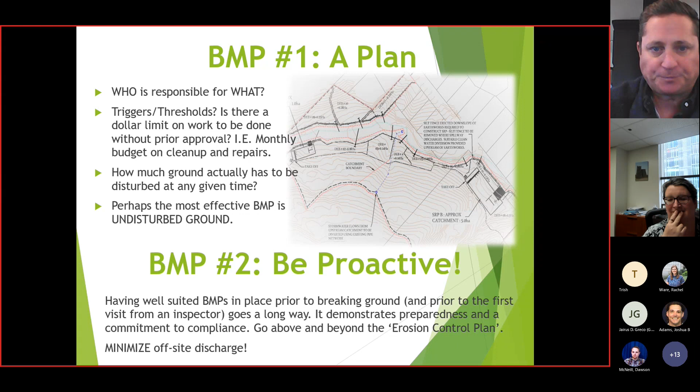I also like to define the differences between erosion and sediment control. We see this plan sheet that talks about erosion and sediment control. I like to draw a distinction between sediment and sedimentation. You'll notice there I've got the ATION in parentheses. I'll get into that more here in a second, but let's understand that there are two different processes.

There's erosion and then there's sedimentation. Erosion is very simply just the displacement of soil, right? It's soil put into movement. It's soil being removed from its complacent in situ state, its happy state of just sitting peacefully on the soil. And that can happen several different ways, primarily in construction. It's driven by wind, rain, and even the individual raindrops.

But if you think about that soil sitting in its happy state, even wind is not a very erosive force until that soil is disturbed by, let's say, vehicular traffic or rain or something else that disturbs it from its in situ state. So it takes an active force to dislodge soil and pollutants from its happy state. If we think about those different ways of causing erosion, it's driven primarily by two different factors: impact and movement.

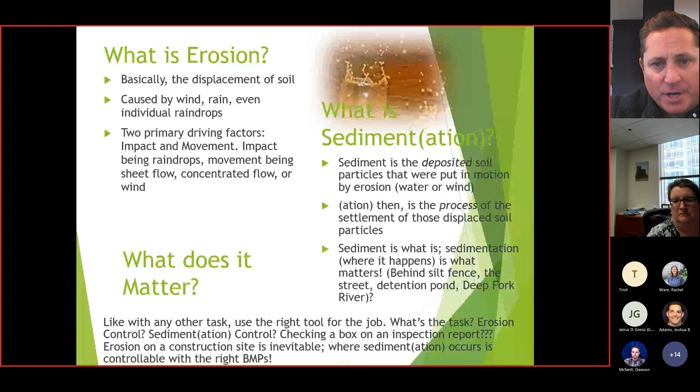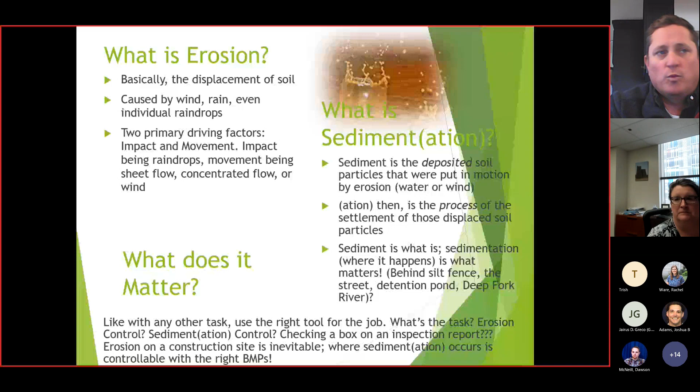Like I brought up earlier, erosion is basically driven by impact or movement. It's like peeling off the layers of an onion. We can peel back one more layer and ask ourselves whether that erosion is driven by impact or movement. If we look at impact specifically to start with, then we start thinking about what are the best BMPs that we can utilize to minimize erosion from an impact standpoint. Standing vegetation, like I talked about earlier, is number one.

So that can come from either not disturbing it to start with or by stabilizing it as quickly as possible afterwards. That could be achieved by sodding it. It can be achieved by seeding it with a mulch. I'll dive into that a little bit further here in a second.

We've got mulch here. Anything that dissipates the impact of raindrops, anything that dissipates the impact of vehicular traffic, those are the things that prevent the soil particles from being disturbed, which opens them up to being moved later on down the line, creating the erosion. So if we can keep soil particles, pollutants, and debris intact and in place, then we can prevent their movement down the line in a big rain event, windy days, etc.

If we look at the second part of erosion control and look at the movement side, we can peel off another layer of the onion and we can look at that from a sheet flow standpoint versus a concentrated flow standpoint, right? As rain increases, water increases, standing water increases, water that does not percolate into the soil begins to gain in volume and gain in concentration.

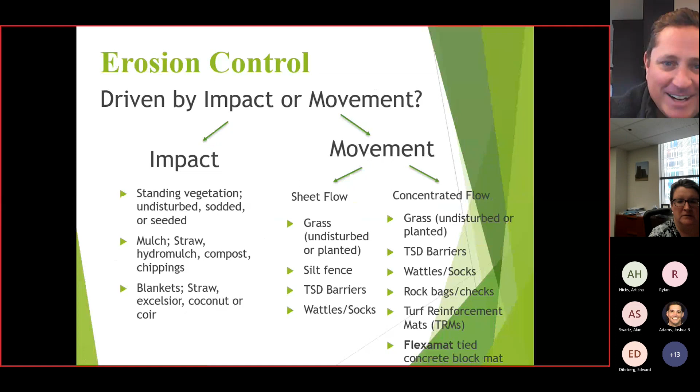So let's start here with mulches. Again, the main function of mulches is to minimize the displacement of soil particles from the impact, right? So mulches are designed to absorb the energy, be it from... okay, I'm gonna try to make sure we're not doing this automatically here. All right, so mulches are designed to minimize the impact of either raindrops or vehicular traffic, right?

There are different varieties of mulches that can be used. We'll start out here with chippings. Chippings meaning vegetation that was on site of a construction project that was run through a grinder or a chipper as opposed to being burned on site or hauled off. It can be an expensive process to grind things up. Obviously, burning is far less expensive than chipping. But if you have chosen and have on-site chippings, then utilizing those chippings on-site is a very cost-effective mulch, right? You're making use of something that would have otherwise been a waste product.

Chippings are very effective at dissipating the raindrop impact, right? And that is where erosion starts. I like to point out that chippings typically should be thought of as a temporary use. They probably need to be removed prior to final stabilization, right? They're difficult to sod over.

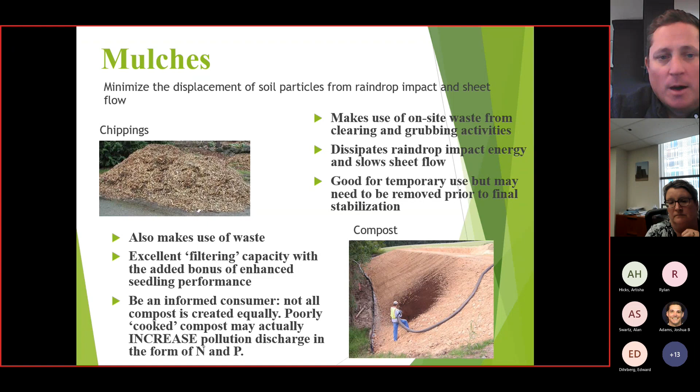Straw blowing is another very cost-effective way of minimizing impacts of raindrops, minimizing the potential for soil to be dislodged and put into an erosive state.

Must be hitting the wrong button. We're going too fast here.

Straw mulch is an inexpensive and readily available material, right? There's hay, there's also native grass. Hay can be used, or excuse me, I said hay straw. There's wheat straw and hay that are readily available in Oklahoma most years. Kind of expensive this last year with the rain situation, most of it being fed, but it is still, relatively speaking, an inexpensive and available material to be used as a mulch.

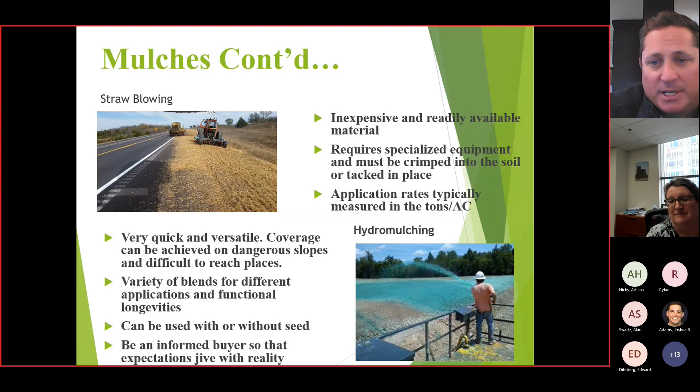As we know, it's windy around pretty much every part of Oklahoma, so hay and straw need to be adhered to the soil in one way or another. Very oftentimes it's crimped into the soil, where a mechanical plow is not the right word necessarily. It's usually a straight shank. It's not turning the soil. Instead, it's pressing the fibers of the hay and straw into the soil, and so they actually flip up like this, and they're crimped in a manner that keeps them from blowing away.

Another way to do that is to apply a tackifier, essentially a glue, something that will hold that straw or that hay into place. Typically, when you think about straw or hay mulch applications, you're thinking about that in tons per acre. It takes an awful lot to do good, right? It's quick. It can be done very quickly with the right equipment, and it's readily available. Moving on to hydromulching a little bit.

This is something else. I can go into that in a little bit more detail here in another slide, but I'm a big proponent of hydromulching. I know that everybody knows what it is. Everybody's heard of it. Some people have had experiences with it.

We'll dive into that a little bit more. But again, it's a very quick, very versatile mulch application. It can be achieved on steep slopes. I think that's really where hydromulching can shine, is that it can be done on steep slopes where it may be too dangerous or just not practical to get equipment, heavy equipment, i.e. tractors, to crimp soil or to crimp straw into place, or places where it's not safe to run equipment to

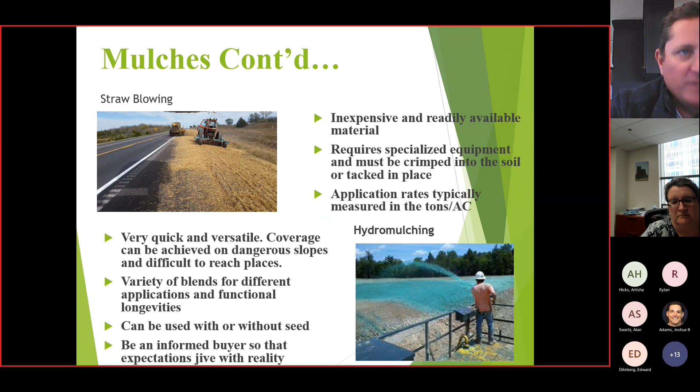Kind of dive into those a little bit more. I like to think of hydromulching as being a very versatile BMP. It can perform multiple functions in that it immediately reduces the impact of raindrops, right? So it's holding soil into place. Because of its textured nature, it can slow velocities, so therefore slow the runoff, which allows more water percolation into the soil. And then obviously we can grow grass seed from it. So as the mulch is sitting on the ground longer and longer, the benefits go up and up.

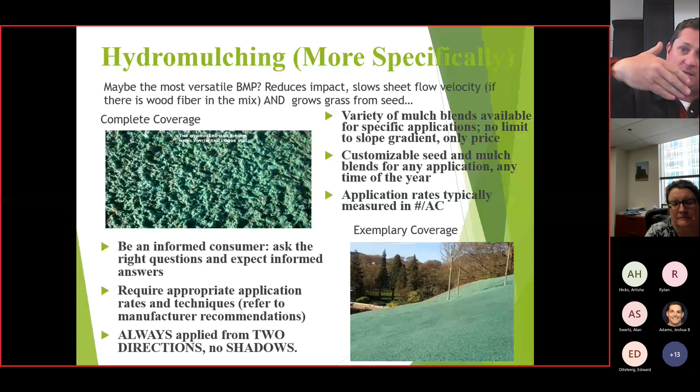Straw is generally one of your least expensive blankets. They're good at dissipating raindrop impact, but they're less effective at slowing sheet flow. And the reason for that is, if you think of straw fibers, they're called straw for a reason, right? They're hollow casings of plant fiber, right? They're the stems. And so they're slick, they're hollow, which means they're lightweight, and they don't absorb any water.

Sheet flows can actually hit straw blankets and, in a sense, speed up a little bit as they wind their way around those straw fibers. And so any flows, be it sheet or concentrated, have a tendency to wash out underneath straw blankets very quickly because you've got the two actions happening, right? The straw's hollow, it floats. The water speeds up and goes underneath the straw.

So for any sort of flow activities, I recommend the Curlex fibers, the Excelsior fibers. Straw, again, not to knock on it, it's a very inexpensive blanket and it's very good at dissipating the energy of the raindrop. Excelsior fibers, Curlex. Curlex is the name brand, most well known. Curlex, we are a Curlex distributor. Curlex is manufactured by American Excelsior Fiber Company.

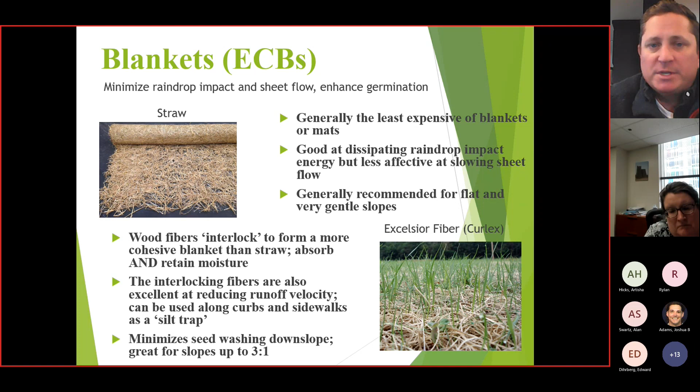Reinforcement and armorment. So we're basically talking about blankets, but stepping that up one notch, right? High performance turf reinforcement mats are still a rolled erosion control product. So they look similar to a blanket. The two blankets that I discussed previously, they are applied in the same manner, right? They're still rolled out and they're still pinned into place. But what differentiates a turf reinforcement mat from an erosion control product is that the turf reinforcement mats are designed to be permanent. Typically, they're made out of non-biodegradable materials, oftentimes recycled materials, synthetic. They've got UV protection built into them.

Typically with much higher velocities built into their standard performance data and much steeper slopes as well. And more varied soil types also. Seed can be applied to the soil with the turf reinforcement mat laid over the top of it, or they can be infilled with soil and sodded right over the top. They are designed for the higher flows and higher concentrations that typical blankets can't stand up to.

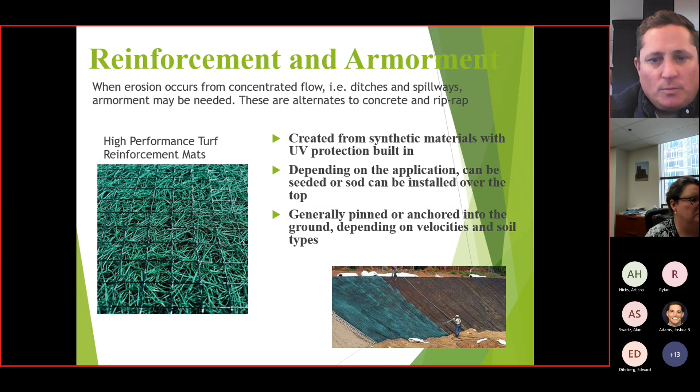Flexamat is another armorment, one step further than the high performance turf reinforcement mats I was talking about. Everybody may be familiar with Flexamat at this point, but basically that is a concrete block that is formed into a geogrid. So you've got the benefits of concrete and the benefits of riprap married up with the benefits of a geogrid. So it's got structural integrity laterally and longitudinally. It is designed to stand up to very high velocities, very high shear strength. But what makes Flexamat unique is that it's also designed to grow vegetation. It is designed for grass to grow right through it.

I like to point out, though, maybe particularly with a crowd that's a little bit more on the industrial discharge side of things, there are a variety of backing options for the Flexamat. We get them with a Curlex blanket, which is that Excelsior fiber I was talking about previously, and a high performance turf reinforcement mat rolled up into the Flexamat. But we can also get it with a non-woven fabric rolled up in it for situations where vegetation is not the end result. So they can be used even as conveyances through parking lots. They can be infilled with asphalt millings, or even gravel, and made for permanent use without vegetation.

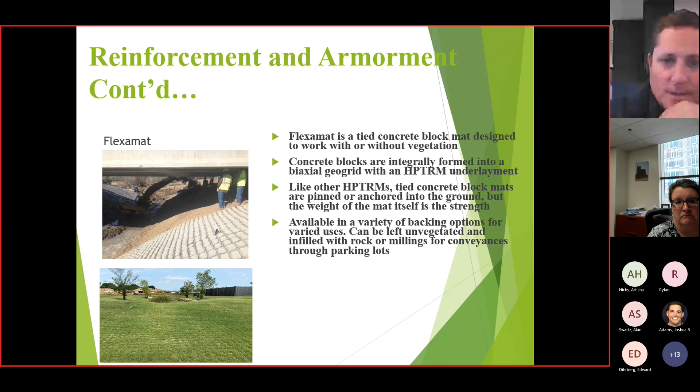So we've been talking about erosion control. Now I'm going to step into some BMPs that are erosion and sedimentation control. And I see them kind of running a little bit long here, so I'm going to maybe blaze through here for a quick second. We all know an awful lot about silt fence, right? It's important to break long runs of silt fence up into smaller runs. This picture is a good illustration of a J-hook. It divides the sheet flow up so that no one section of silt fence is being overburdened by too much rainfall. I like to pose this question.

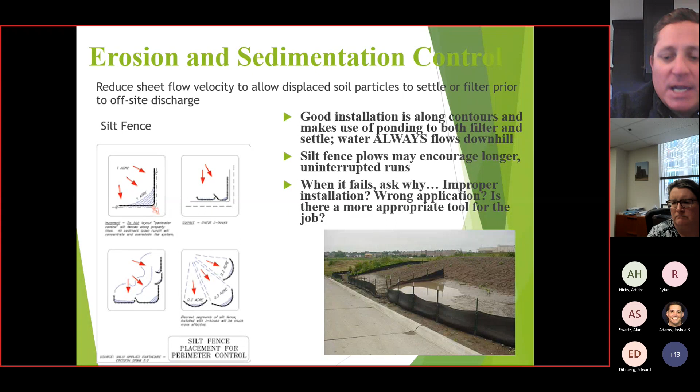When any one particular BMP fails, ask why. Why did it fail? Was it an improper installation, or was it the wrong application for that BMP? Is there something better that can be used, something else that can be used?

Wattles and socks. Again, there are straw wattles and there are compost filter socks that are kind of the go-tos here. They can be used as erosion and sedimentation control devices in the sense that they can be used to interrupt slopes, which slows velocity. Then they act as filtering devices by letting water flow through them and collect sediment and pollutants.

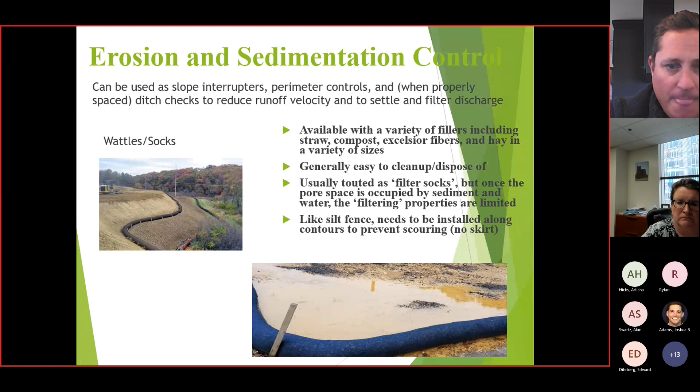Our triangular silt dike barriers, very durable, very versatile erosion and sedimentation control device. For those that aren't familiar, our triangular silt dike barriers are made from an open cell foam wrapped in a woven geotextile. So that's going to allow for durability, a long lifespan on those. They're not a filtering device like the wattles and compost filter socks are. They are a settling device primarily.

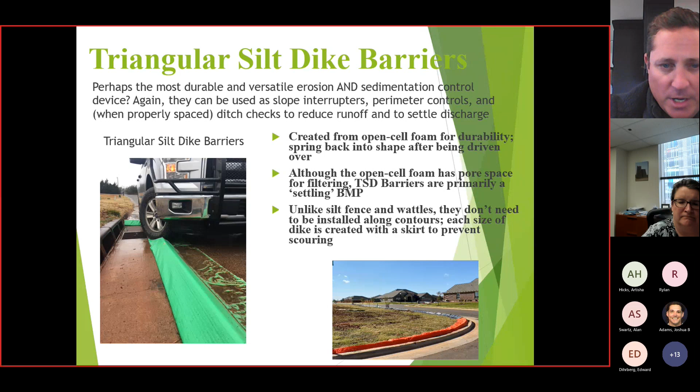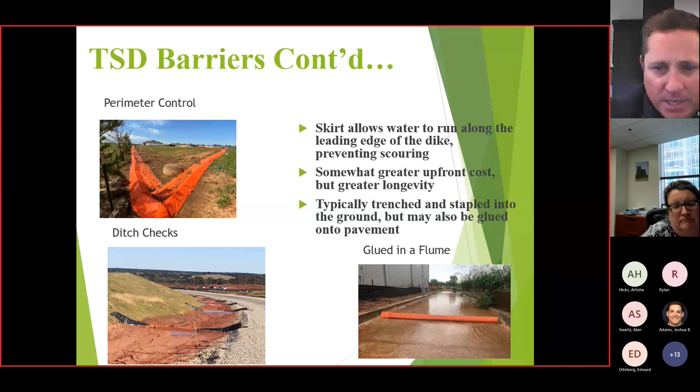Our triangular silt dike barriers have a skirt on the upstream side, which allows the water to run along that leading edge of the dike, which prevents scouring. So that's something that kind of sets them apart from the straw wattles and the compost filter socks. They're also very versatile in the sense that they can be used in a variety of different manners. Most of the time they're trenched into the ground and stapled into place, but they can also be glued onto pavement as well.

Sedimentation control more specifically. Here, I've added a couple of slides to the last time I did this. I wanted to draw attention to a couple of other different products and different ideas. I think it's important to think about this when you think about erosion control and sedimentation control. The bang for the buck varies tremendously. Erosion control up at the top end of the food chain, you get the best bang for your buck. You've kept as many soil particles in place for the amount of money that you're spending.

And as things move downhill and further down the line and become more concentrated, you're spending more money for number of soil particles saved, right? So when we start to get to the point of solely sedimentation control, we're thinking about things that are like our last ditch efforts, the last things we can do to prevent offsite discharge. So because of that skew, there's more variety in the sedimentation control products than there are in the erosion control products.

I get calls all the time about all manner of different products. Folks asking, do we stock this? Do we stock that? Can we get this or that? There's a wide variety of different sedimentation control products for any one given application. We stock what we found to be the bread and butter. So there are lots of different things out there, but what we've got are kind of the tried and true that we found.

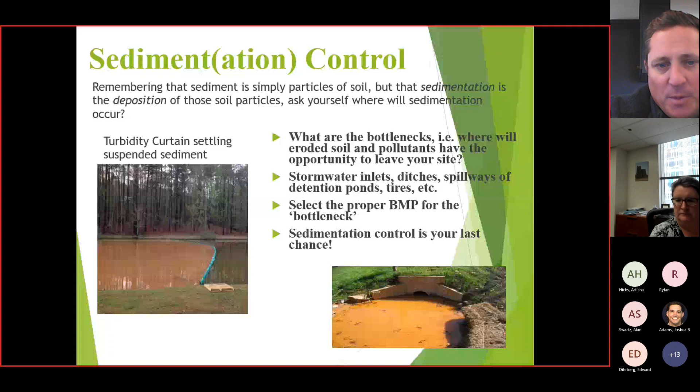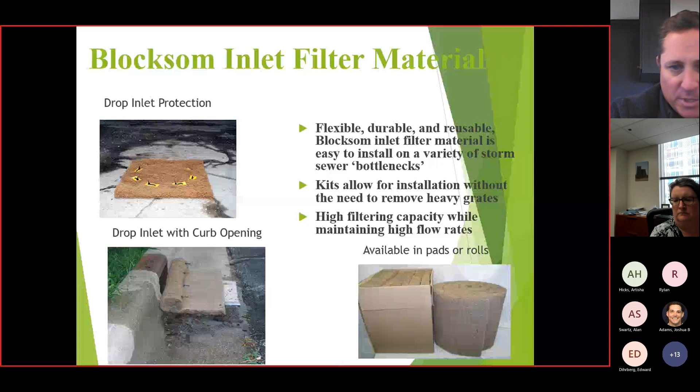Instead, this material can be cleaned above ground. It can be cleaned and reused. Generally, the accumulated sediment and debris can be removed with a shovel. The inlet material itself can be brushed off, broomed off, cleaned up, and pollutants and sediments can be hauled off.

It's reusable in the sense that once it becomes laden with sediments, you can cut the zip ties, retain the little yellow parts that you see there. That's part of the kit. You can retain those yellow pieces, cut the zip ties, keep the bag or keep the material, wash the material out, reinstall it simply with new zip ties. This product is designed for a usable life of greater than 6 months.

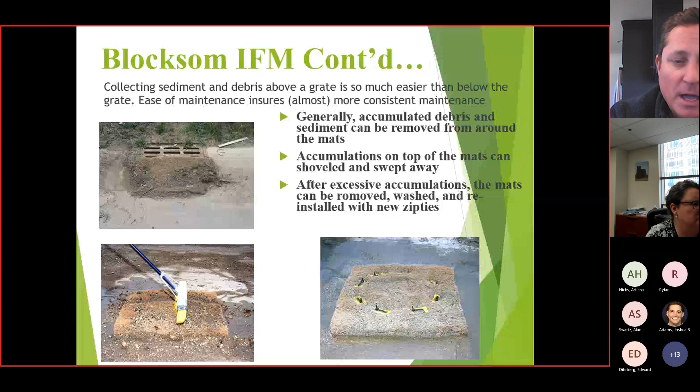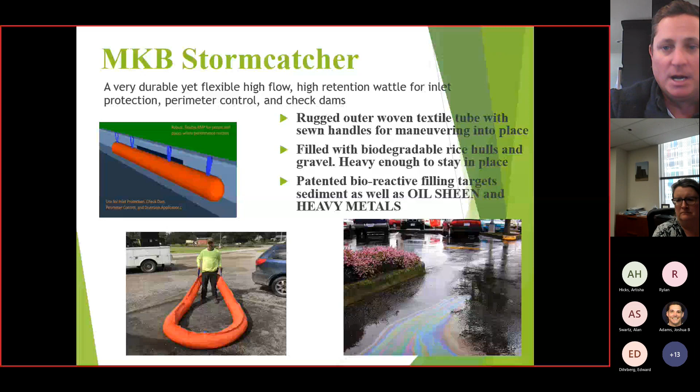In closing, I like to point out the idea that we value ongoing relationships, not just the sales. We've got a tremendous brain trust at Triangular Silt Dike Company. However, we don't pretend to know everything all the time. So I like to reach out to you guys and ask, what are the ongoing challenges? What has worked for you in the past? What doesn't work for you, and why? You know, a rising tide lifts all boats. So if there's something that I can learn from you guys, I'm open to it. And if there's any information, any experience that we can share with you, it's reciprocated.

I think the industrial permit side of things has not typically been in our wheelhouse, but it's something that we can learn more about. And I do think that myself and Bobby Gibson and Jason Roach and Gary Roach, if you've met any of us, we like a good challenge and we like to be problem solvers. So if there's anything else that we can help out with, help solve problems, help make things easier, let us know. Reach out at any time. I'd like to know how we can leverage our connections and our capabilities to help you guys.